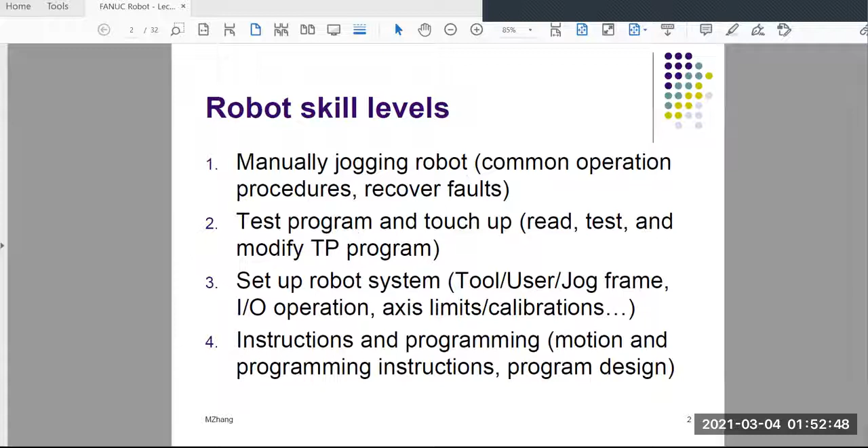Let's move on to the first one: how do we do robot jogging with the coordinate system? That's another term used in the Fanuc robot. More specifically, there are two basic coordinate systems - one is called joint, the other is called world. Those are the two basic jogging methods you have to learn at the beginning.

First let's talk about the joint coordinates - that's easy to understand. A very common robot format has six axes, so we call them axis, or they also use the term joint. That's why you see letter J used to represent them. Counting from the bottom, there's joint number one, J1.

You can see here the servo motor rotates the robot from the base, from left to right and side to side. Counting from the base up, this will be J2 - this robot controls joint number two, which moves the whole robot body forward or backward, leaning it. Number three is this one on the back, which raises the upper arm upward or downward.

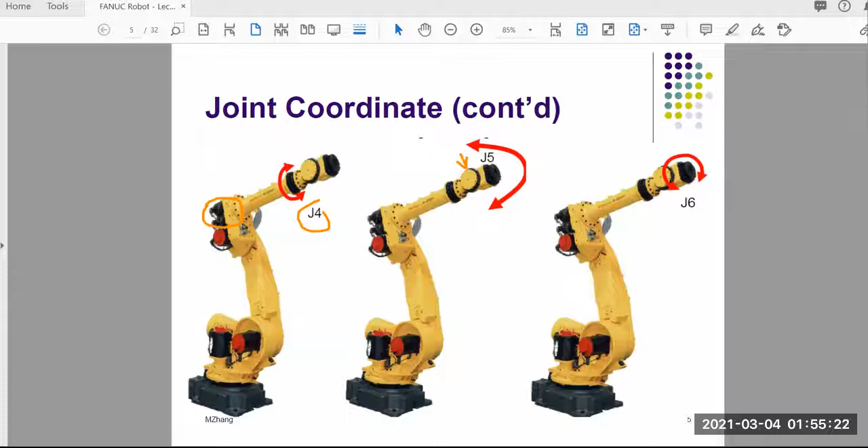If we continue on, we get to what they call the minor axis, coming from J4, 5, and 6. In this particular robot model, all three servo motors are on the back. J4 twists the arm from side to side, and J5 moves like a wrist on your arm, flipping the hand up and down.

Number six is the very last one, called the face plate - at the end of the robot arm, that's where we mount the tooling on top. With J6, you can rotate your tooling around. So these three axes, 4, 5, 6, are called minor axes - they control the orientation of your robot tooling. They have small movement, but allow minor detail changes in the direction of your tooling.

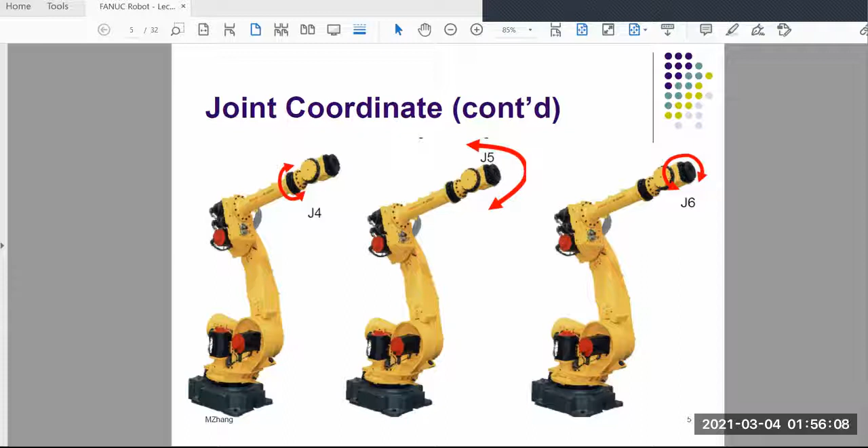With the robot simulation, you can very easily see how to control them. This particular robot model I'm showing is very easy to spot all the joints - this is number one, this is number two, and so on.

When we use the teach pendant to jog the robot - here's the teach pendant. First we turn it on, and there's a shift key; those are details you can learn from the lab. But pay attention to the corner here - it currently shows 'world', which is the current coordinate system.

So if we want to change, we have to press the key called COORD key to change to a different mode. There are a few of them. So first we learn joint.

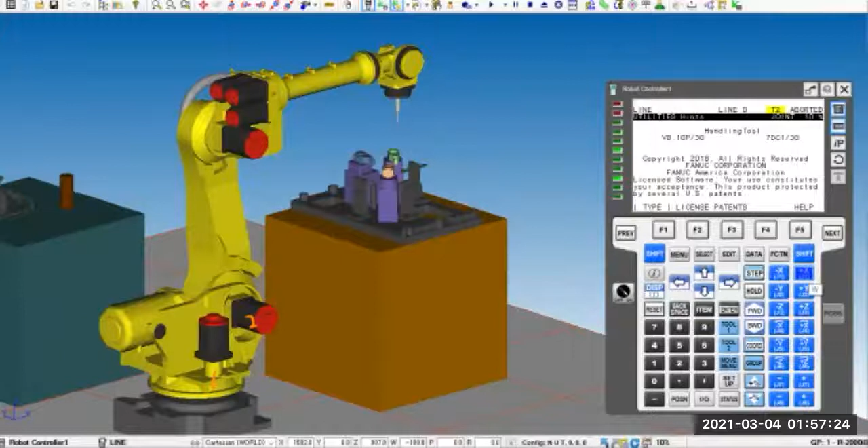Once we switch to joint, press and hold shift, and on the side you have all the joint keys. Right now I'm highlighting J1. When you press one of the J1 keys, you will see the robot start to move. Let me speed up a little bit, 50%, so you can see bigger movement. You can see the robot rotation here. If I release the key, the robot will stop.

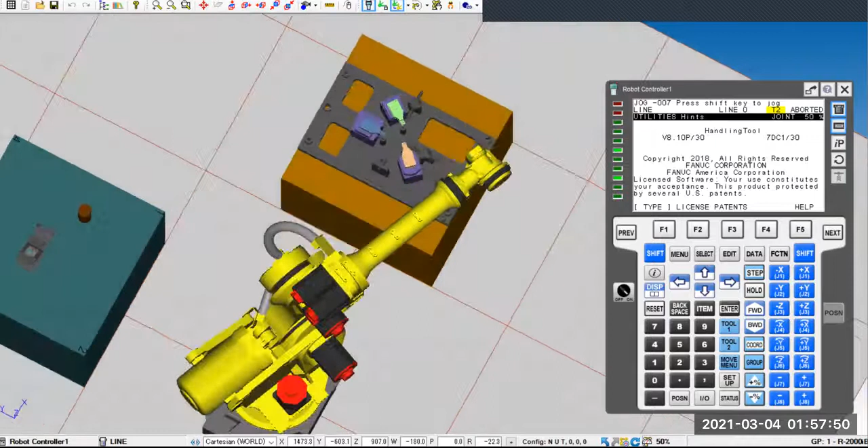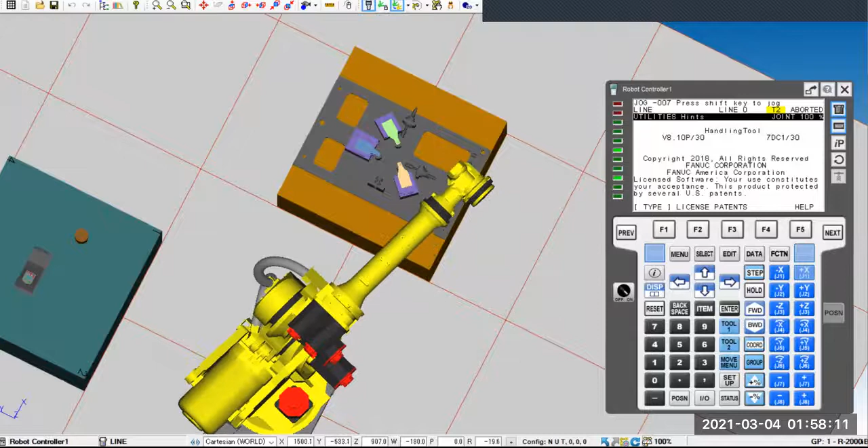So if I change the view, maybe you can have a better view of the movement. If we look at the robot from the top, top view, you can see J1 will control the rotation from side to side. I can even make the move faster. You can see here, this is one way to rotate the robot, and this is the other way. Positive and negative, two different directions. So this is J1, it rotates around the base.

And if we look from a different angle, look at J2, controlled by this part of the robot. You will see that corresponding to these two keys, the robot will lean backward or forward. You can see the movement here, controlled by this servo motor.

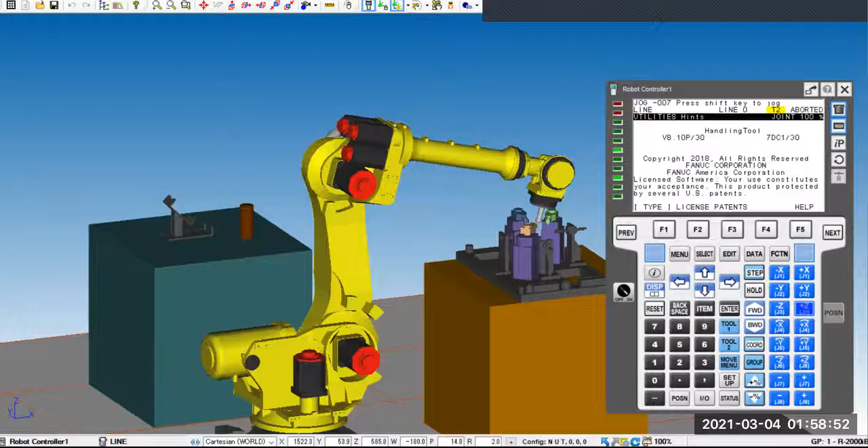And J3 is here, and this one will control the upper arm to different directions. On the teach pendant, we can locate J3. Shift, one of them will go downward, the other will go upward. So this is J3, and J4, 5, 6 are on the arm here.

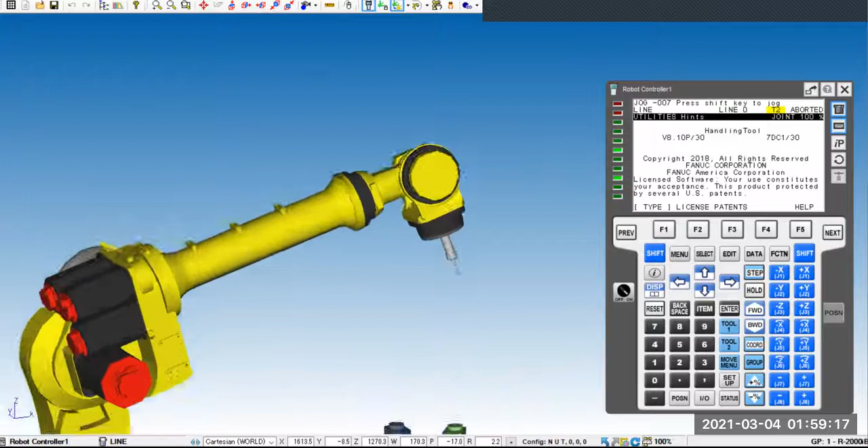You can imagine that 4, 5, 6 move differently but in a similar fashion. So that's 5, which I'm controlling right now. For 6, if I rotate, you probably won't see that because the tooling is symmetric. Unless I zoom in here - if you look at the pointer when I jog on J6, you may see a little bit of movement, some minor movement here.

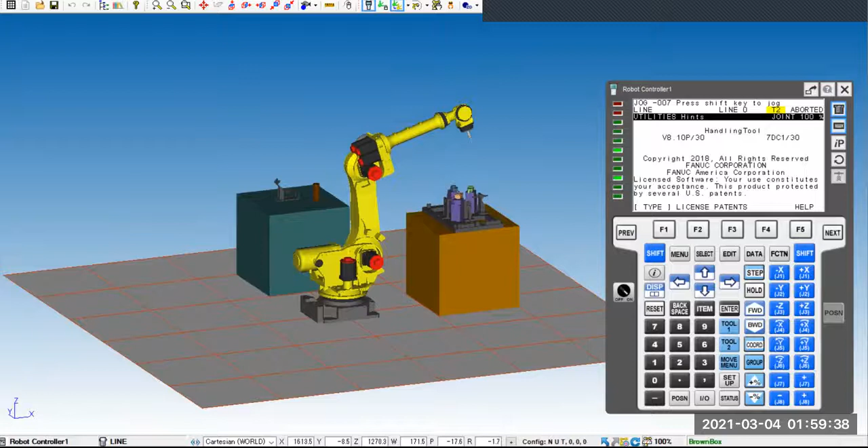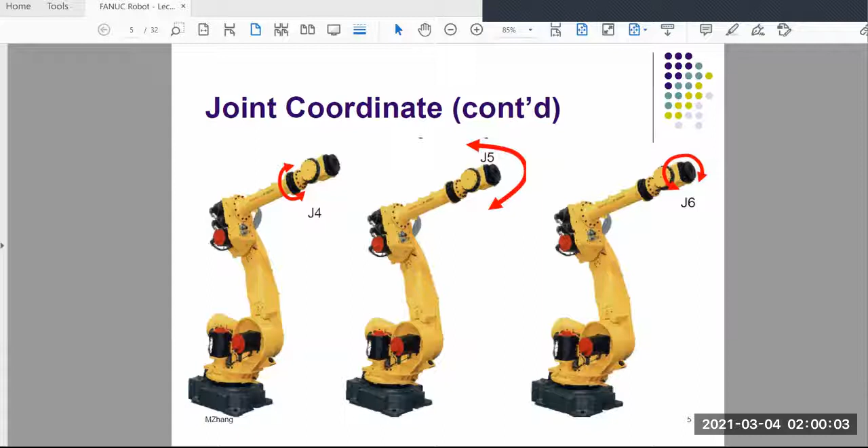So this is the first way we can jog the robot, called joint. Very straightforward because we have 6 axes, so we can control them independently. But if you press more than one key, like 2 or 3 keys together, of course they will move together. Not many people try to jog the robot that way because it's hard to control them in a consistent way. And also you have other choices.

So the second choice is what we call the world coordinate. We can jog the robot in what we call the Cartesian fashion. When we talk about Cartesian fashion, that means you have X, Y, and Z, 3 dimensions. Of course, you will have 0, 0, 0 at the beginning, called the origin. Notice here, the origin is somewhere around the robot above the base, not on the floor. Later on I will show you that. So that will be the beginning, 0, 0, 0.

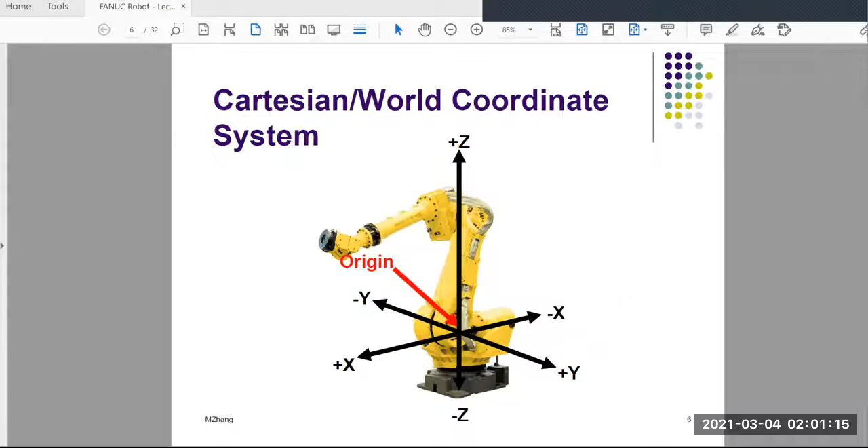And then you will have one axis point to positive X and negative X. On the other side, you will have positive Y and negative Y. So this is the 2 dimensions, X and Y. And at 90 degrees is the Z axis - one is positive, the other is negative. If you still remember the geometry you learned in high school, that will be the same thing.

When we talk about the robot world coordinate, there's a right hand rule, so we can predict the direction of the robot movement. When I talk about robot movement, I'm talking about the tooling - the base normally doesn't move, so the base will stay there.

So we can have a look with the robot simulation. All right, let me switch back here.

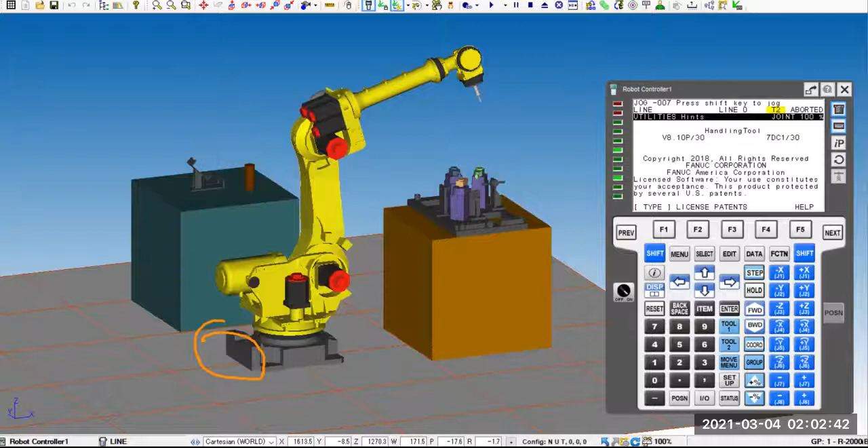So that's the robot base. And if we look here, this is the back of the robot. And I just talked about the right hand rule, right? So if you remember the right hand rule here, you can see your index finger will point to the positive X, in this direction.

And then that way is the positive, that's a bad drawing. All right, let me redraw it. So that way, that's supposed to be in the same plane, right? Two dimensions will be positive Y, and at 90 degrees will be the positive Z. So that's the first right hand rule here, and probably it's really hard to look at from this position. I'm going to show you how to do that later, right?

But right now, I need to quickly move to the home position so we can have a look. So at this location, if we switch the coordinate system, notice here we are in world right now. Now I can speed up a little bit to 50%. Those keys before we used to jog joint J1. But once we switch the coordinate system to world, those two keys represent X, right? One is positive X, the other one negative X.

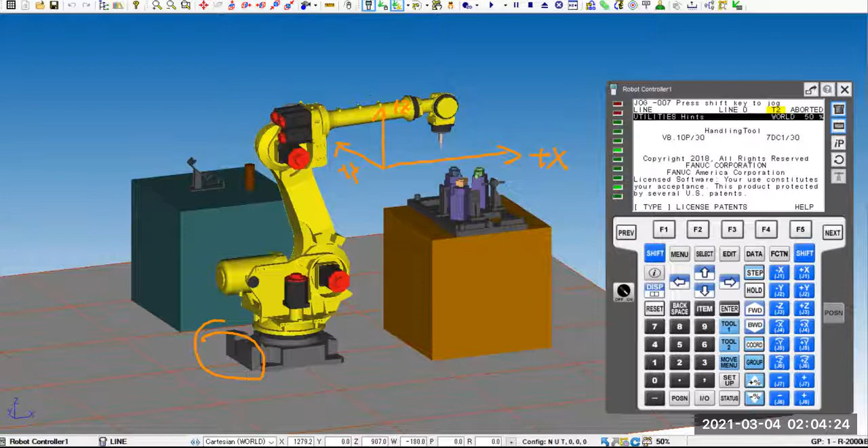So if I press and hold shift, positive X, look at this pointer, it will move that way, right? So that's what you will see here. So that's positive X and negative X, right? So let me switch to maybe a different angle so you can have a better look. Let me clear this out.

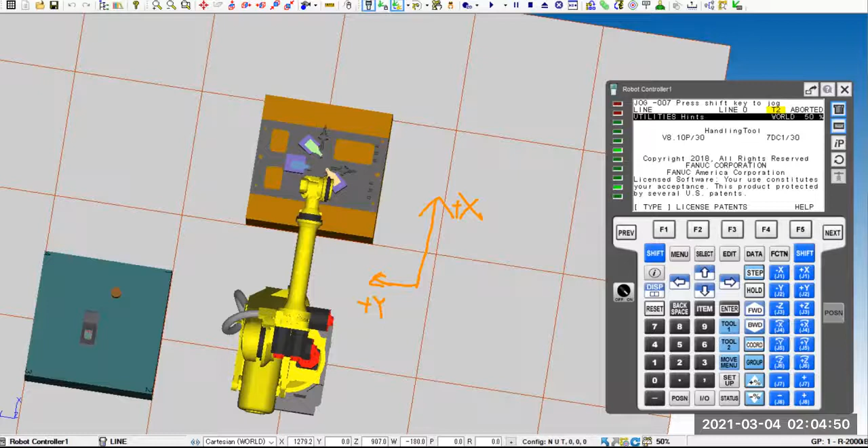So again, if we look from the top, let me draw that. If we look at these two dimensions, that will be the positive X, and that will be the positive Y according to the right hand rule, right? So shift positive X, you will see the robot is going in that direction, and negative X, go backward, right? And if I look at positive Y, you can see the robot moving straightforward, right?

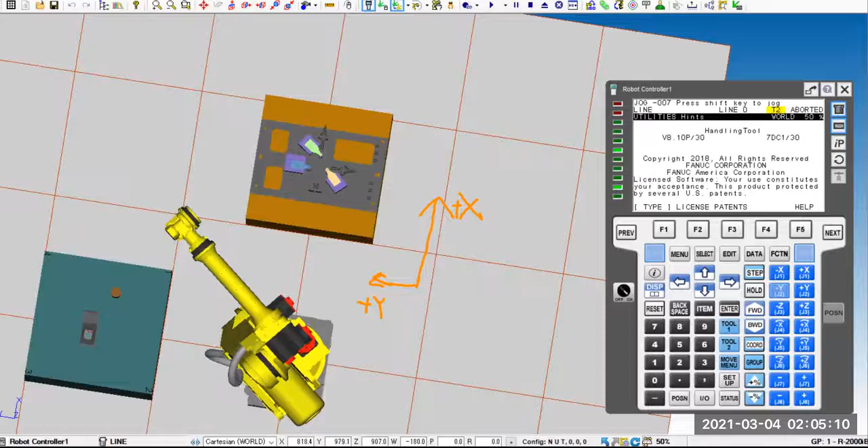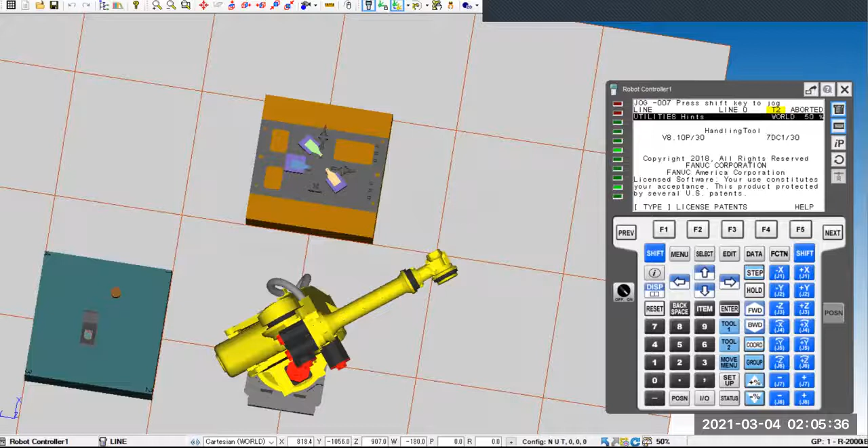Notice that that's different from joint. Joint movement will be a circular movement, but world is straight. You can see the robot maintains a straight line, right? If you notice the markings on the floor, there are straight lines here. So the robot movement follows that, right? So that's X and Y. Let me switch back here.

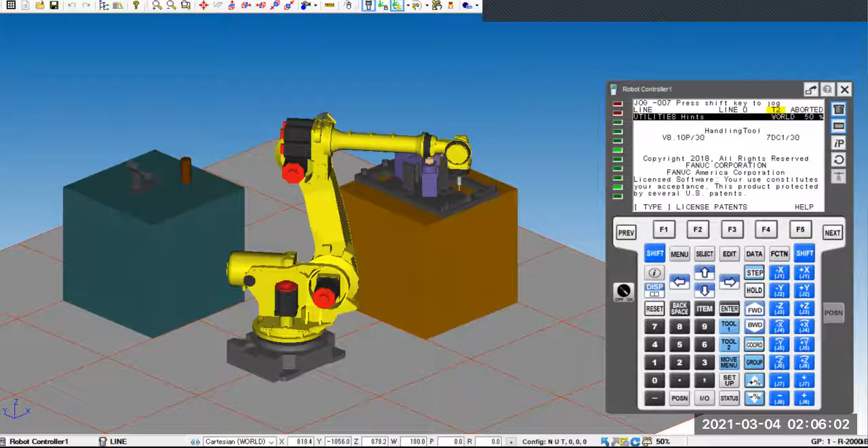And if I jog Z, that will be positive Z, straight up, not circular movement. You can see that. Later on, in the next video, you will see more clearly with numbers. Now I'm just showing you the visual movement. So this involves the right hand rule, all right? But there are more complicated movements with the world. It's called orientation of your tooling.

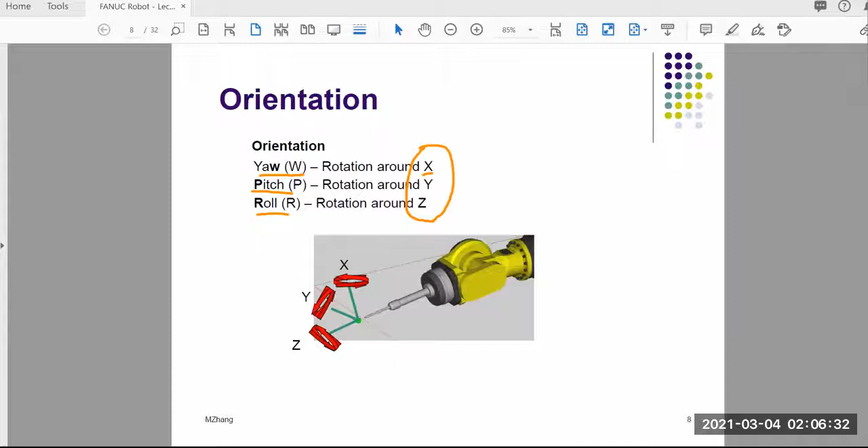So you can control the rotations around the three axes. If you control around X, there will be yaw, represented by W. Yaw, pitch, roll represent the rotation around X, Y and Z. They are rather complicated, really hard to understand, but we have to understand in which situation we use that, because not only do we want to precisely control the location, sometimes we also want to have rotation directions around X, Y and Z.

Then how do we determine the positive and negative? I call that the second right hand rule. Those six keys I just demonstrated are X, Y and Z like this, right? Then if we want to decide the rotation, that'll be the second right hand rule. That'll be the lower six keys here. For each rotation, rotating around X, you can have the minus X rotation and also the positive X rotation. Same thing for Y and Z.

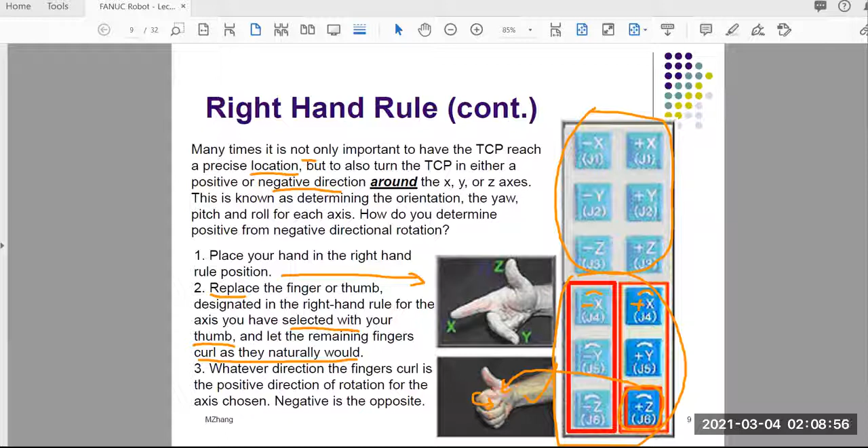I know sometimes it's really hard to understand at the beginning. That's why I have some videos to try to let you understand the rotations. Let me bring them up. Hopefully that will help you. All right. Those videos I shot from the robot trainer. Right. So from this robot trainer, you can see this is the back side of the robot. Right. First, you need here. This is back. Right. This is back.

This is front. And if you understand the first right hand rule, right, so this will be your positive X rotation. And that will be your positive Y rotation. And then on top of that is the Z, positive Z rotation. All right. So right now we're trying to rotate around Z. If we rotate around Z, we use your thumb to represent the positive Z from the first right hand rule. And then the other four fingers will curl this direction. So that'll be the positive Z rotation.

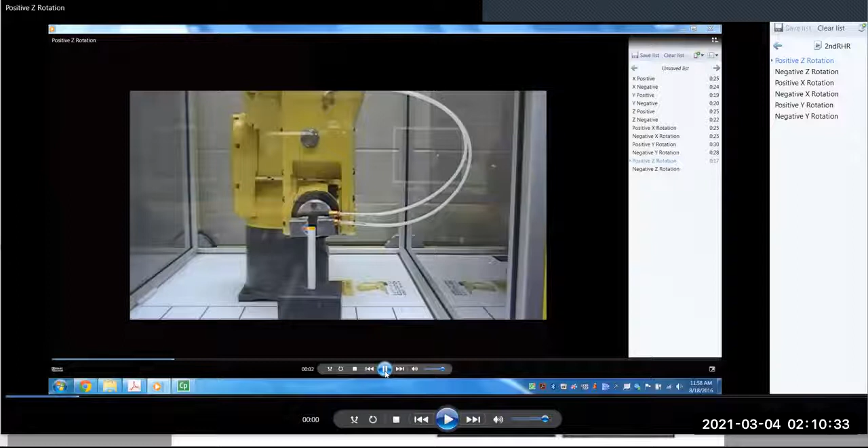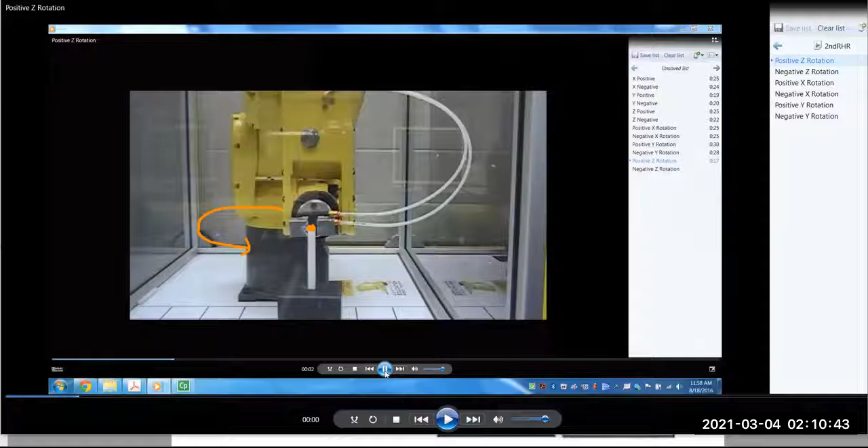So that means the robot tooling center point, called TCP, will remain here on top of the white stick, and then the whole robot body will rotate in this direction. All right, so I'm going to play the video. You will pay attention here. TCP stays, remains here. Then the robot will rotate this direction. So that'll be the positive rotation. Let me clear that. So let me play the video for the positive Z rotation.

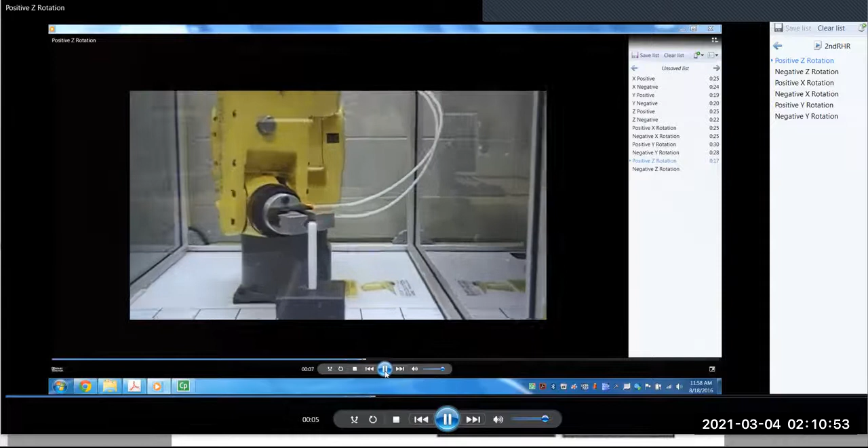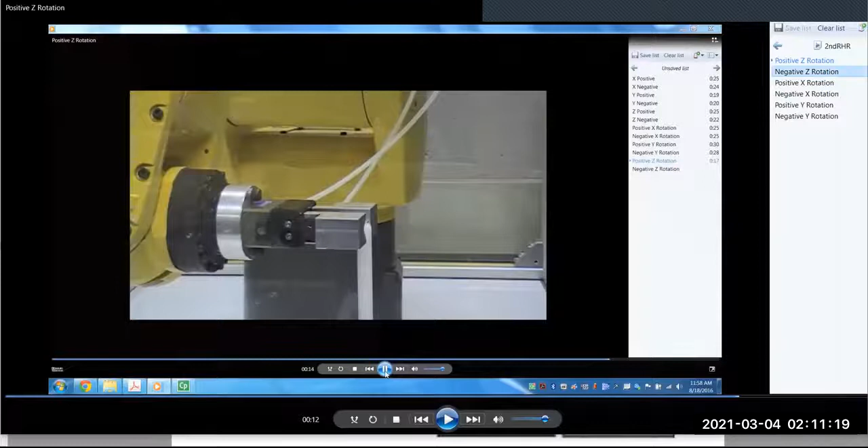So you can see here, it rotates around the stick. Right? It doesn't move away, it just rotates around in the positive direction, like I mentioned before. So it starts around there, right? It rotates this way. That's exactly what your finger indicates if you put it in the right direction, right? So of course the negative Z rotation, the next video I'm going to play, is the opposite direction, right?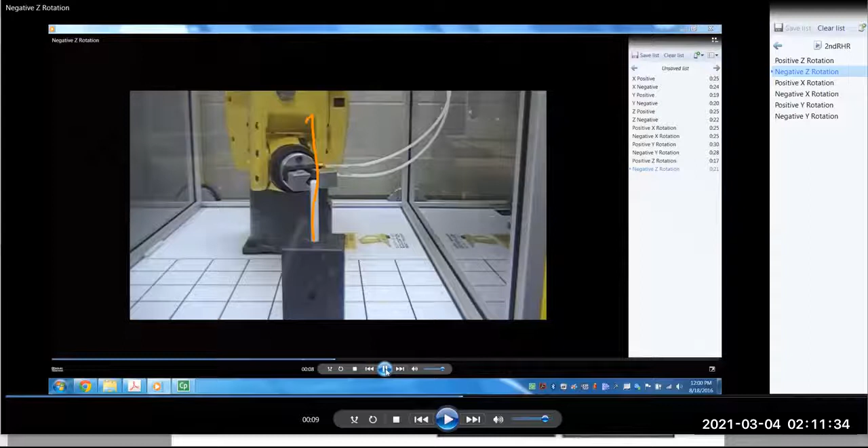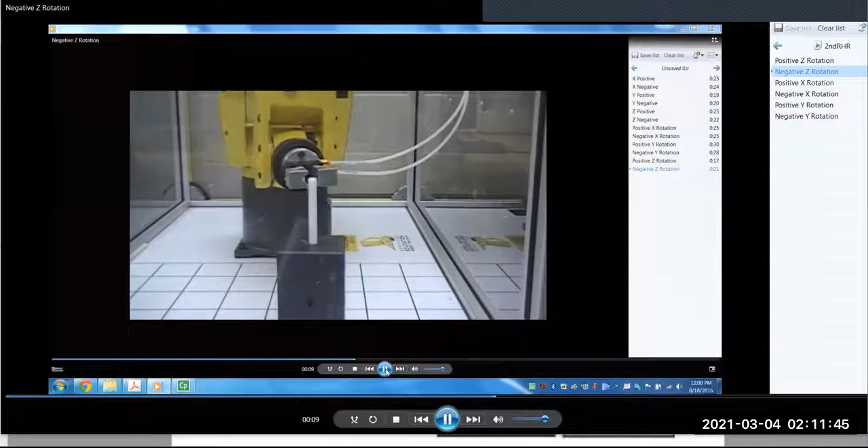So that will rotate around Z, right? Because you can see here, let me show that. So that will be the Z, right? So it rotates around that, right? Okay, so this is the rotation around Z. Let me finish here. Go back here. That's the beginning, right? So that's Z. Then let's look at the rotation around X. That's the next two I'm going to play.

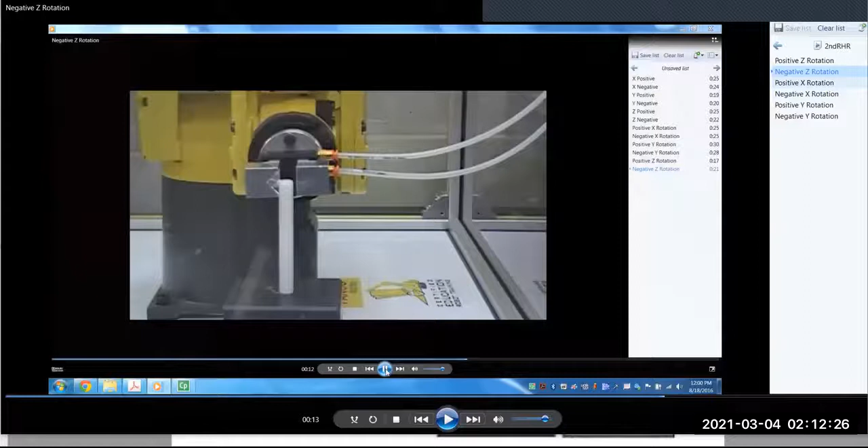Like I mentioned before, positive X is this direction. This is positive X. So if you use your right hand rule, use your thumb. So thumb, I use T to represent. Then when you point your thumb in this direction, the other fingers will rotate this direction. Right? Curl this direction, that'll be the positive rotation direction. Let me switch to the positive X rotation. So let's start from here.

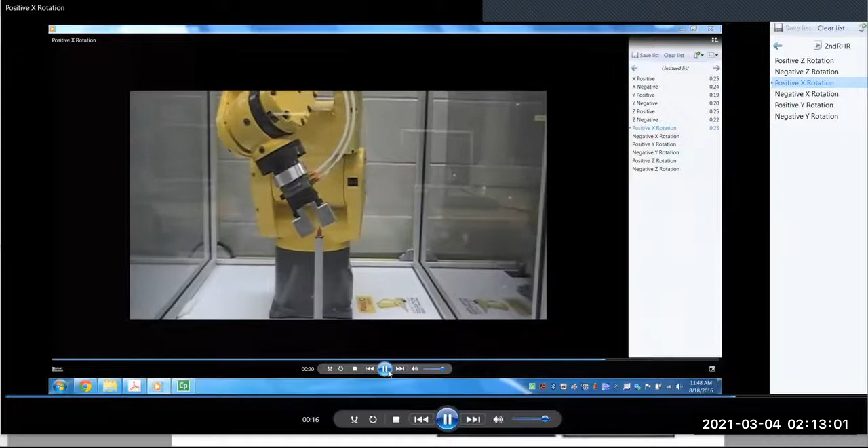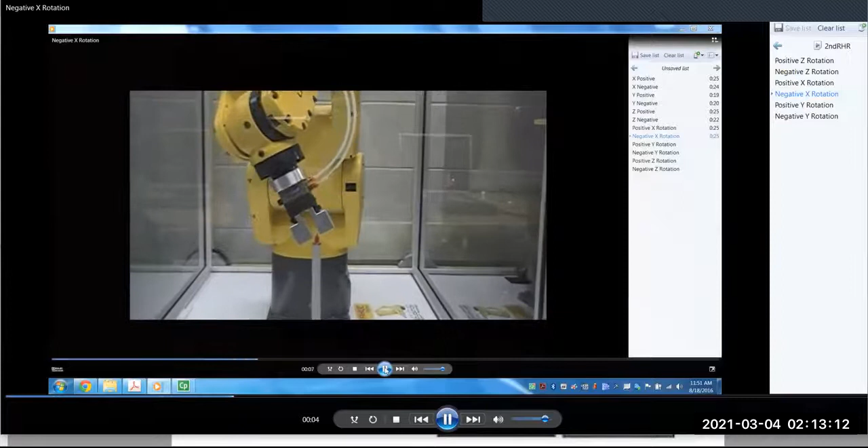You can see the robot will rotate. So TCP again, TCP will remain here. The robot body will rotate this direction. Right. So let's play the video. Look at there. So it rotates. Again, TCP doesn't move, it rotates around this direction. So you start from here, right? Rotate around this direction. All right, let's move. Of course, negative X rotation will be the opposite. Rotate from this side, rotate to the other direction.

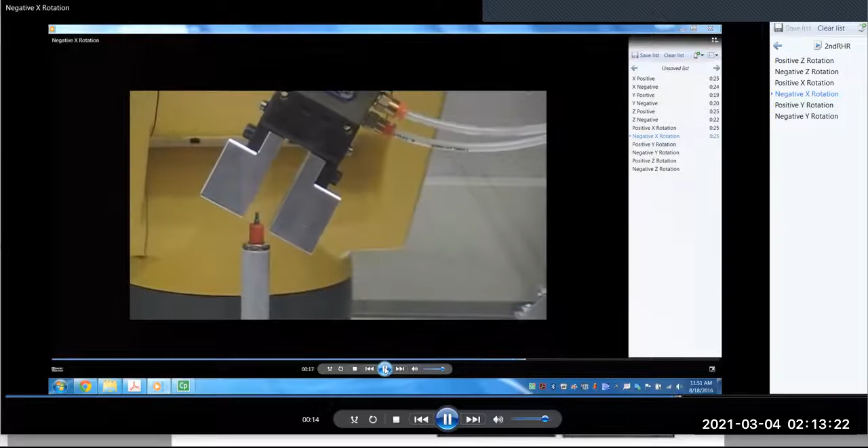All right, so next I'm going to play the Y rotation. Y rotation is a little bit hard to look at from this angle, but if you pay attention, you may find it there. So let's look here. So you can see right now the TCP is here. So if I draw that rotation, it'll be this way. It's really hard to represent. I'll let you observe it. Then let's look at the movement.

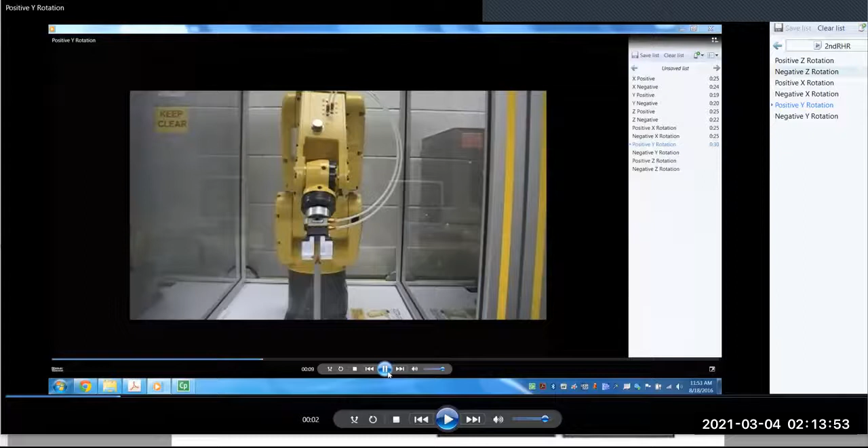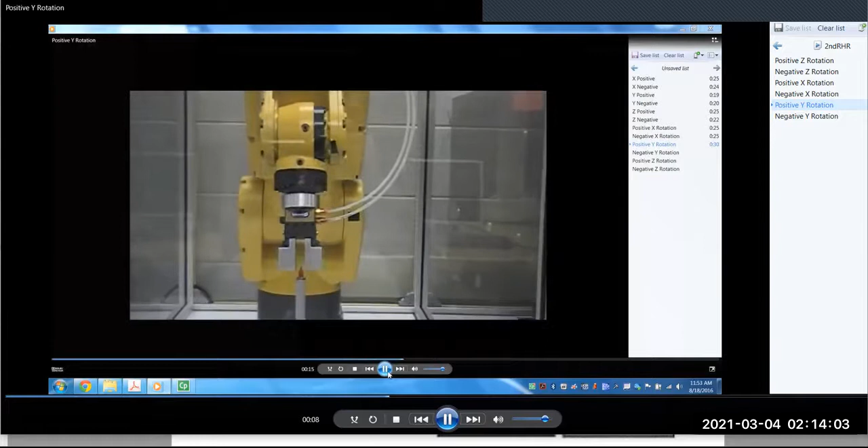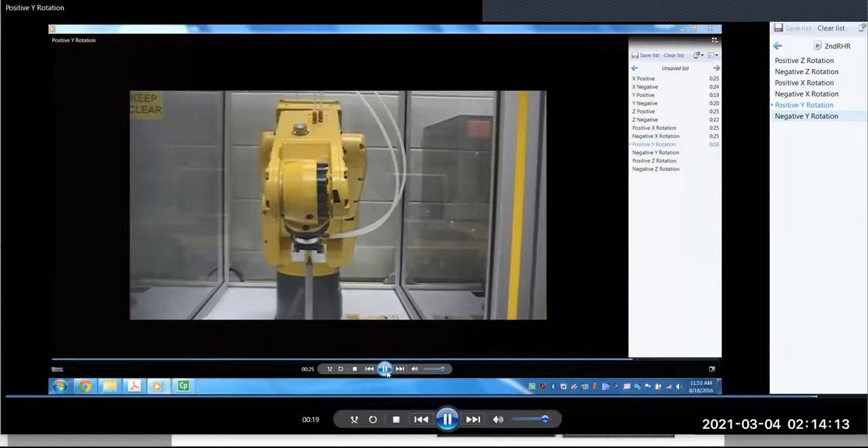All right. So positive Y rotation is here. So again, TCP stays there, and then the robot arm rotates. You can see this part, right? It's getting close to you. It rotates there, and this is positive Y rotation, right? And the other side is the negative Y rotation. Right? It takes some time to comprehend it and remember that and understand it.

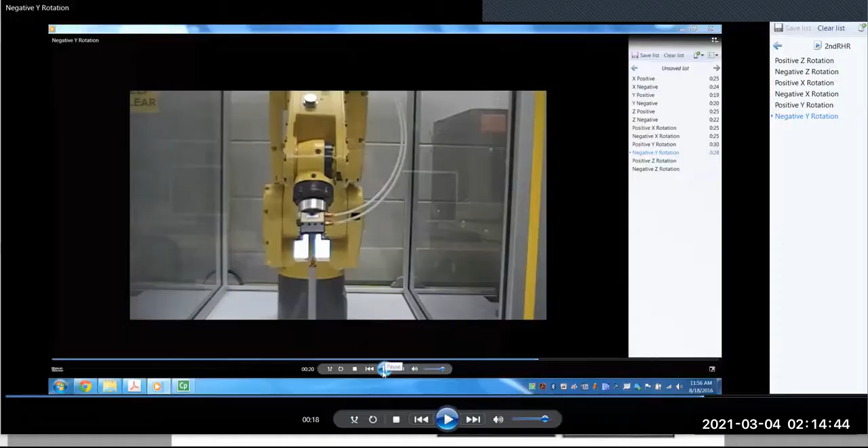Right? Every year I see some people who get this point very straightforwardly, very easily, but it will take most people some time to get used to this movement. All right. So this is the first video I'd like to talk about. All right. So I will have more topics I will talk about later. All right.